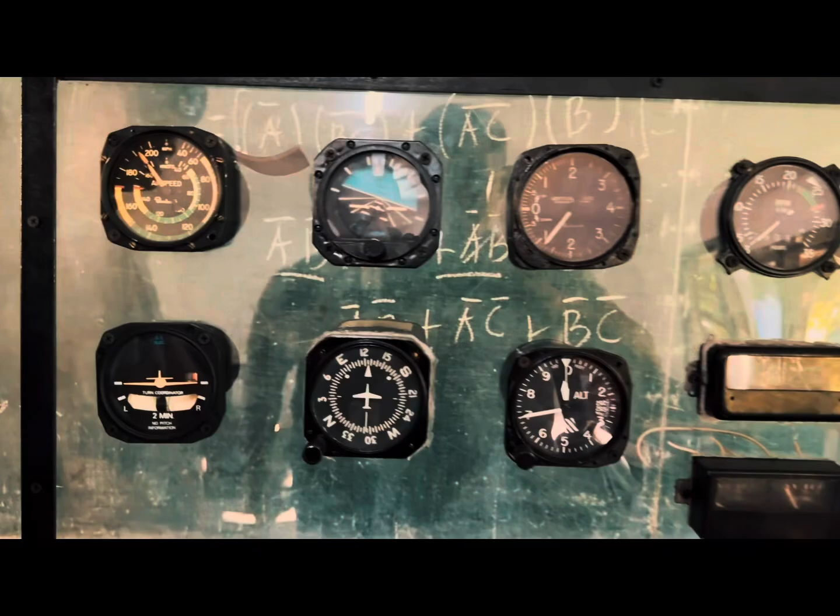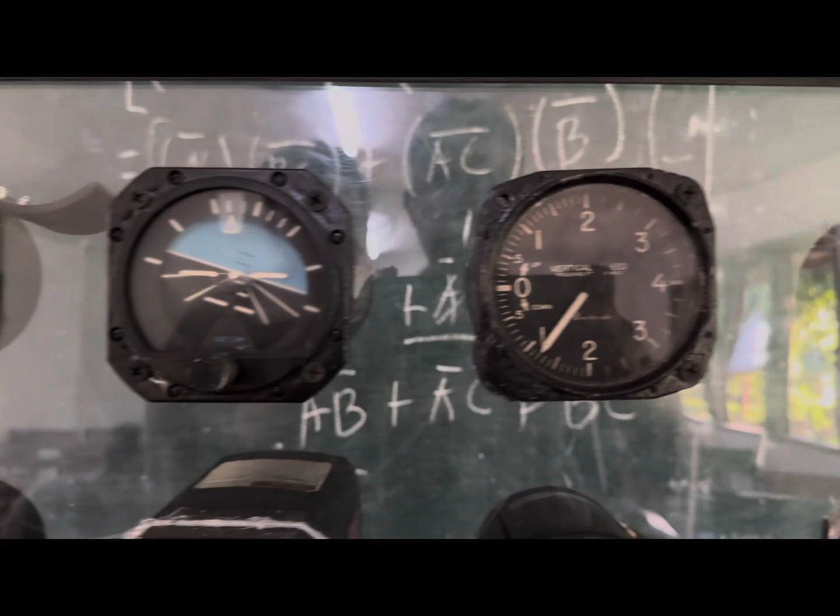In this video we're going to talk about the 6-pack instruments and the other instruments or gauges such as tachometer and oil pressure and temperature gauge. Without further ado, let's get into it.

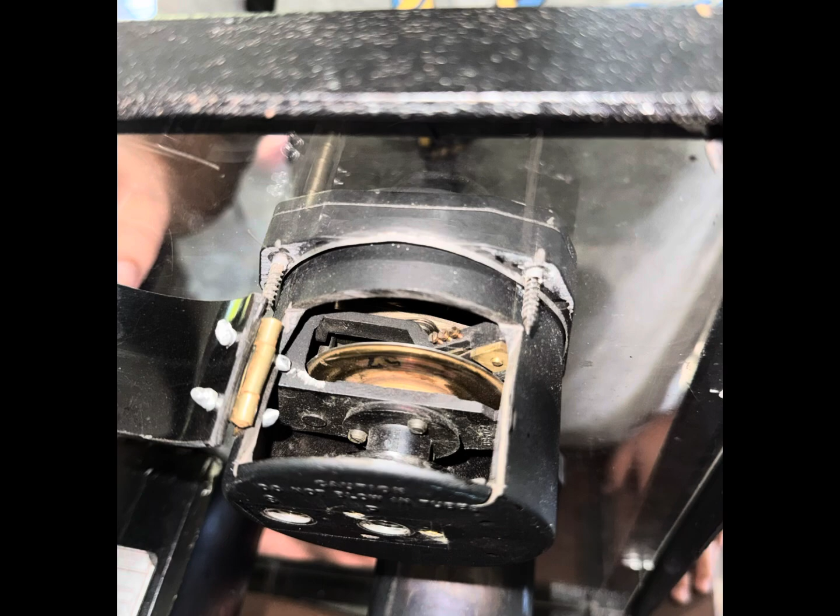Let's start with the airspeed indicator. Its function is to display the aircraft's airspeed in knots or miles per hour. How it works: connected to the pitot-static system, it measures the dynamic pressure difference between total and static pressure, and the reading is calibrated to indicated airspeed.

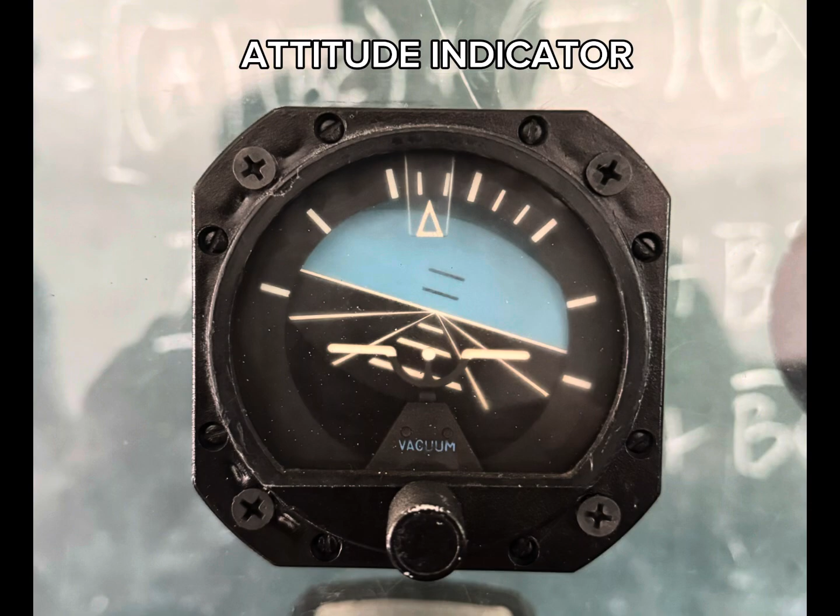Attitude indicator, or artificial horizon. Its function: shows the aircraft's orientation relative to the horizon, including pitch and bank angle. This is how it works: it uses a gyroscope to maintain a fixed reference. The instrument face displays the horizon line with a miniature aircraft symbol that indicates the aircraft's attitude.

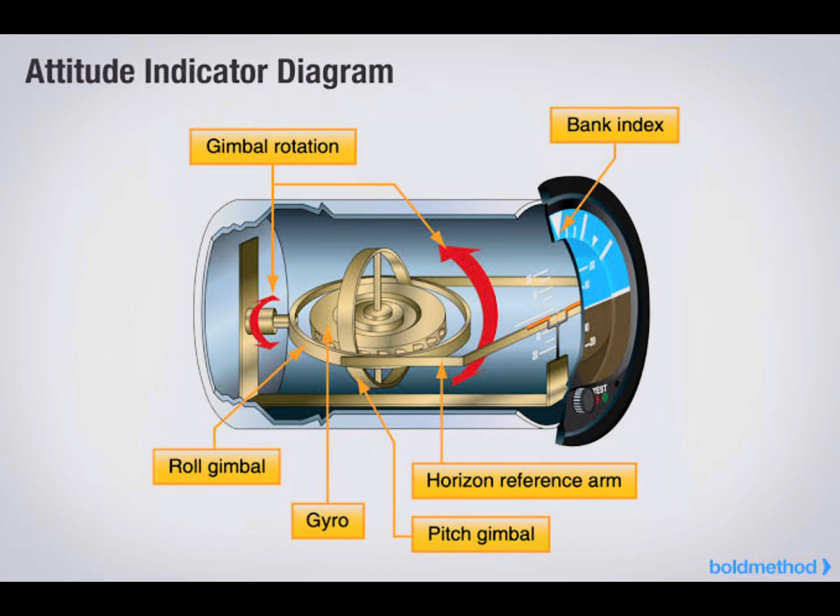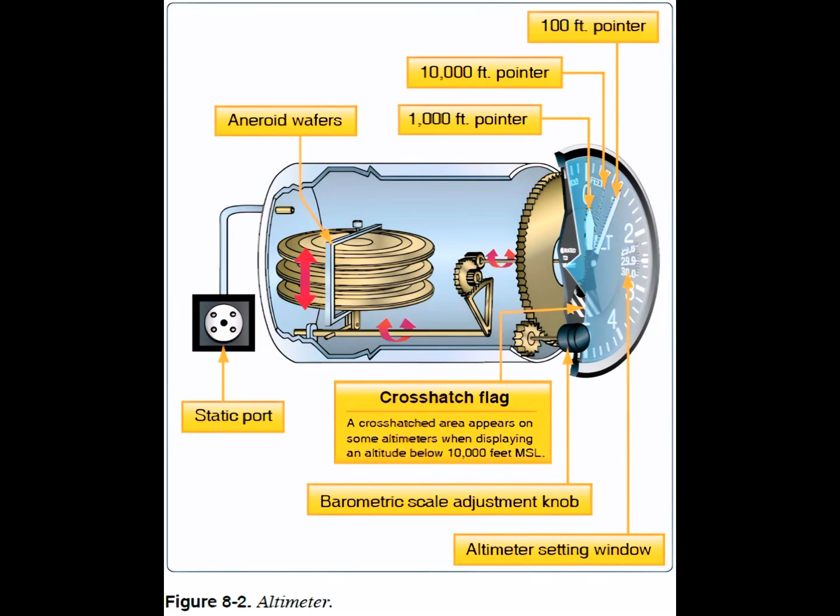Let's move to the altimeter. Its function is that it displays the aircraft's altitude above mean sea level, or MSL. How does it work? It uses the static pressure from the pitot-static system. The instrument contains aneroid wafers that expand or contract as static pressure changes, moving the needles to indicate altitude.

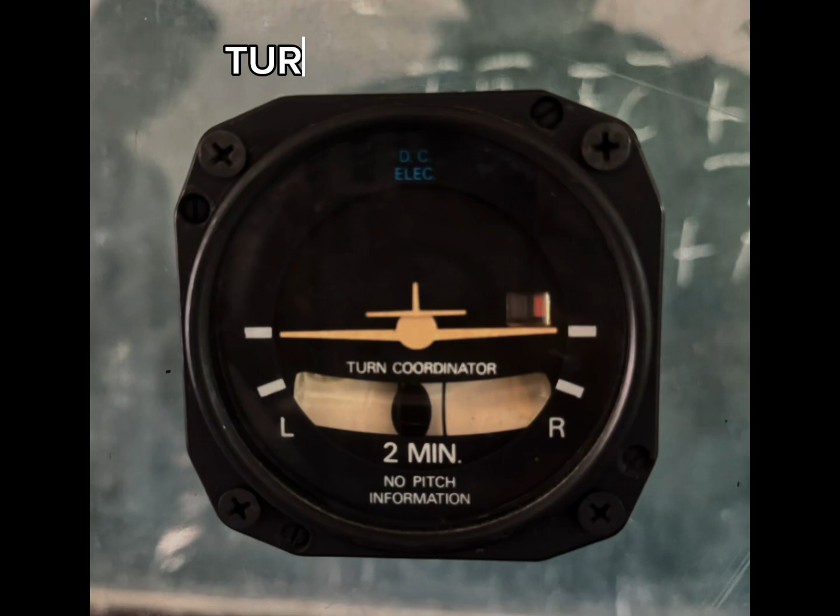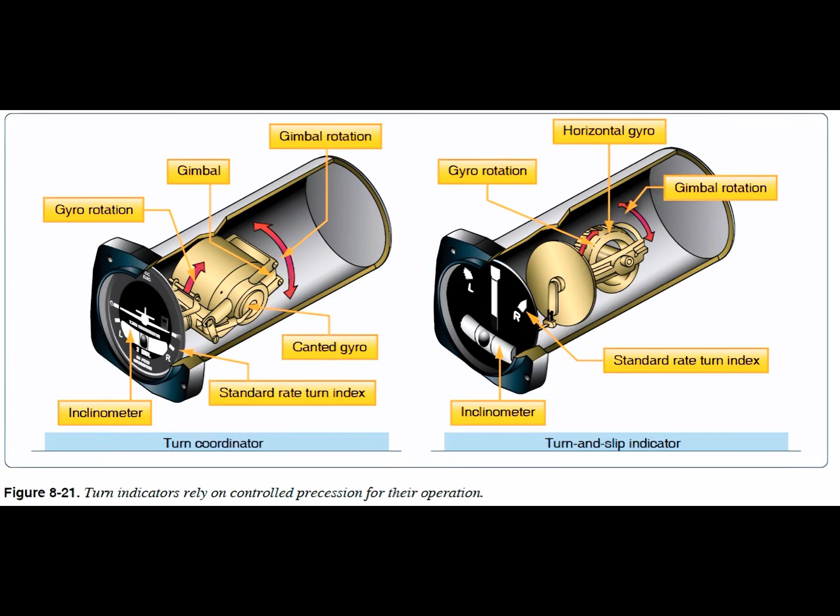Turn coordinator. Function: it indicates the rate of turn and slip or skid condition. How it works: it operates with an electric gyroscope for turn rate and an inclinometer to indicate slip or skid. A coordinated turn keeps the ball centered.

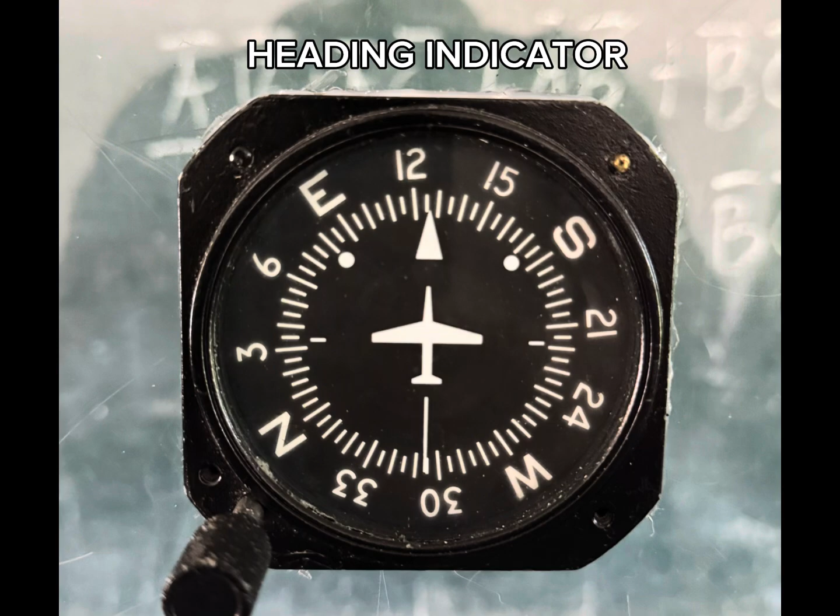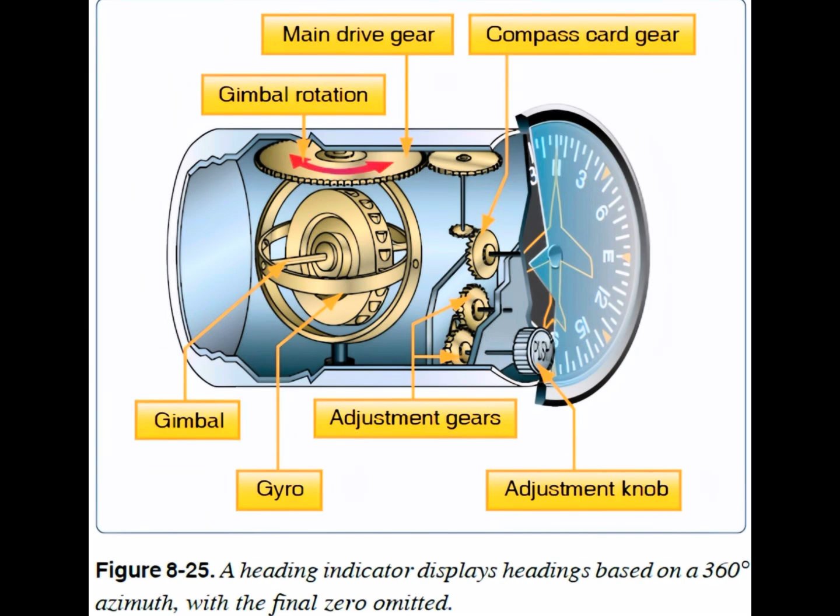Heading indicator. Function: displays the aircraft's heading relative to magnetic north. How it works: a gyroscope provides a stable reference for heading. It requires periodic alignment with the magnetic compass because of gyroscopic precession and drift.

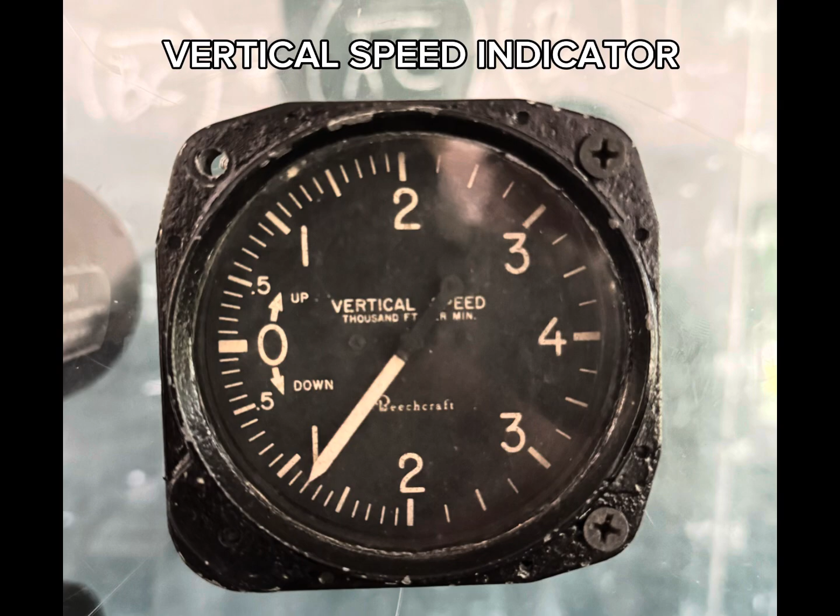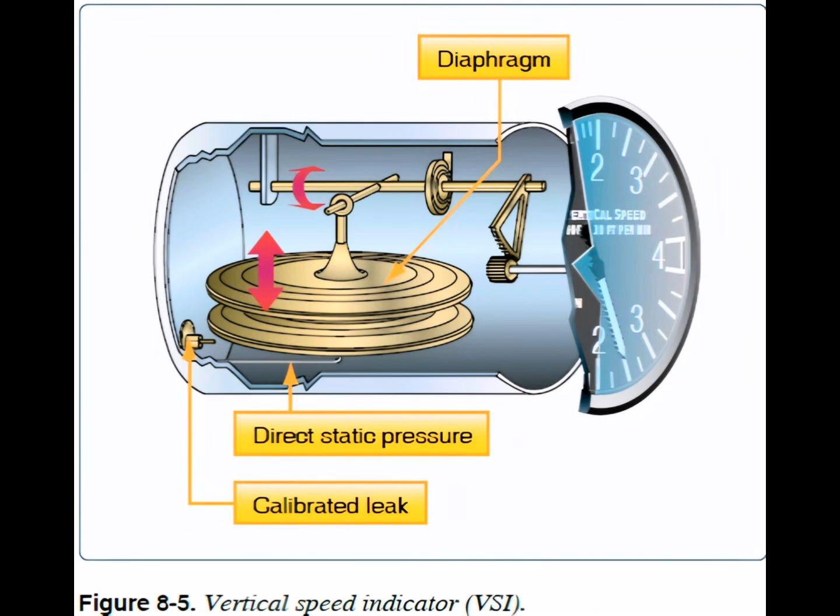Let's move to the vertical speed indicator, or VSI. Its function is that it indicates the rate of climb or descent in feet per minute, or FPM. How does it work? It measures changes in static pressure. A calibrated leak allows the pressure to stabilize, creating a differential that shows vertical speed.

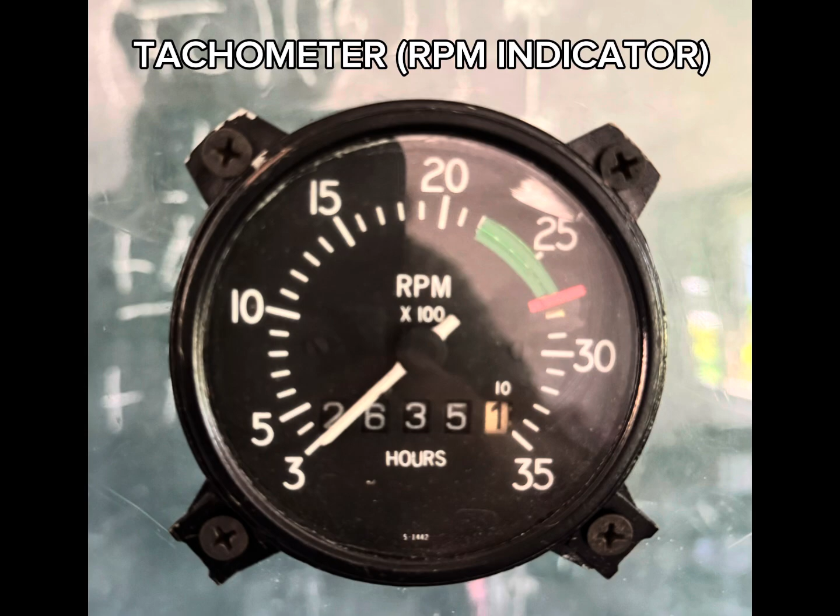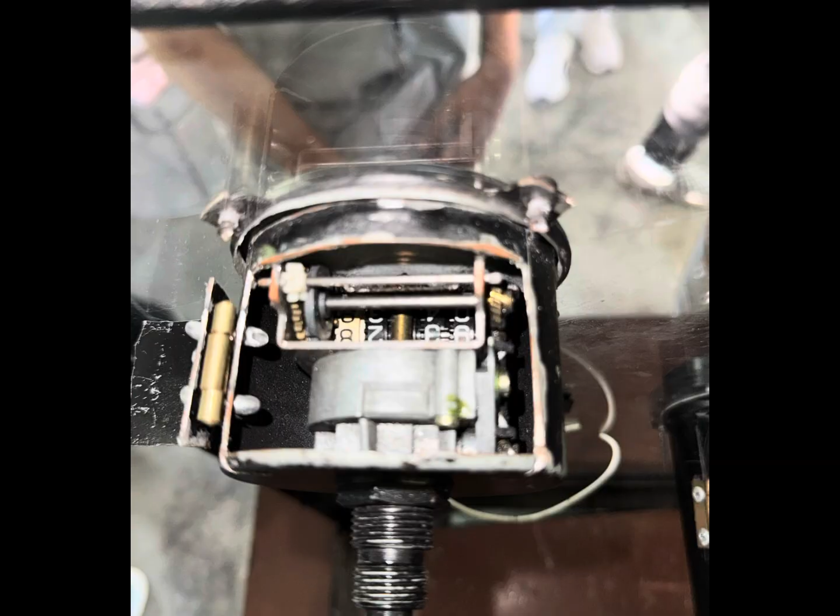Tachometer, or RPM indicator. The primary purpose of the tachometer is to indicate the engine's RPM, allowing the pilot to monitor engine health and set the appropriate power for different phases of flight, for example takeoff, cruise, and landing. So how does it work? The tachometer can be driven mechanically, electrically, or electronically, depending on the aircraft type.

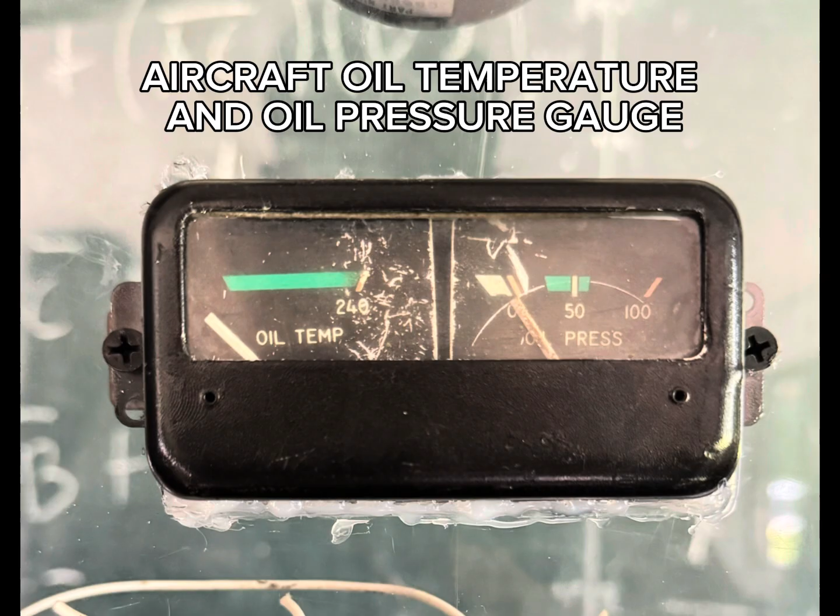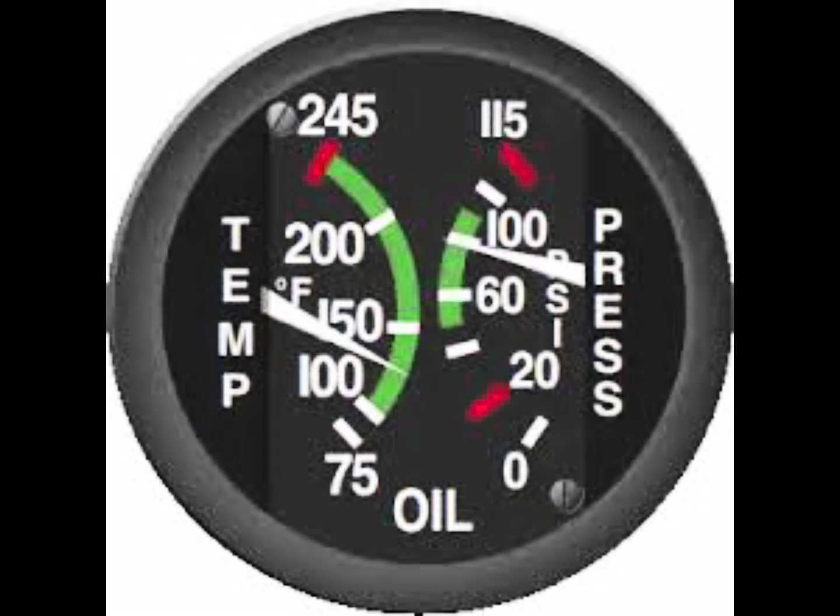Next is the aircraft oil temperature and pressure gauge. These gauges monitor the health of the aircraft's engine by displaying the oil temperature and pressure, which are critical for proper lubrication and cooling. The primary function of the oil temperature gauge is to display the temperature of the engine oil, ensuring it stays within safe operating limits. How does it work? It uses a thermocouple or a temperature-sensitive bulb filled with liquid. The thermocouple generates an electric signal based on the oil's temperature. The signal is processed and displayed as a temperature reading.

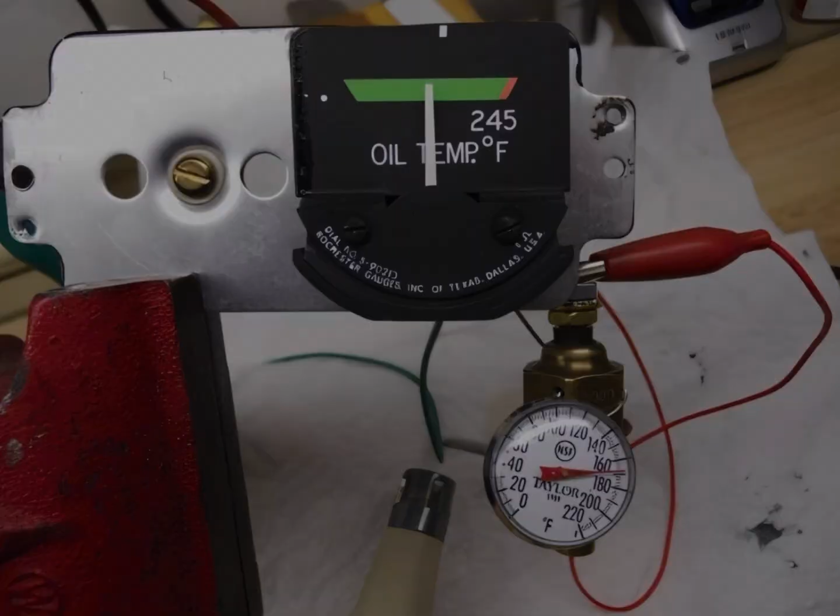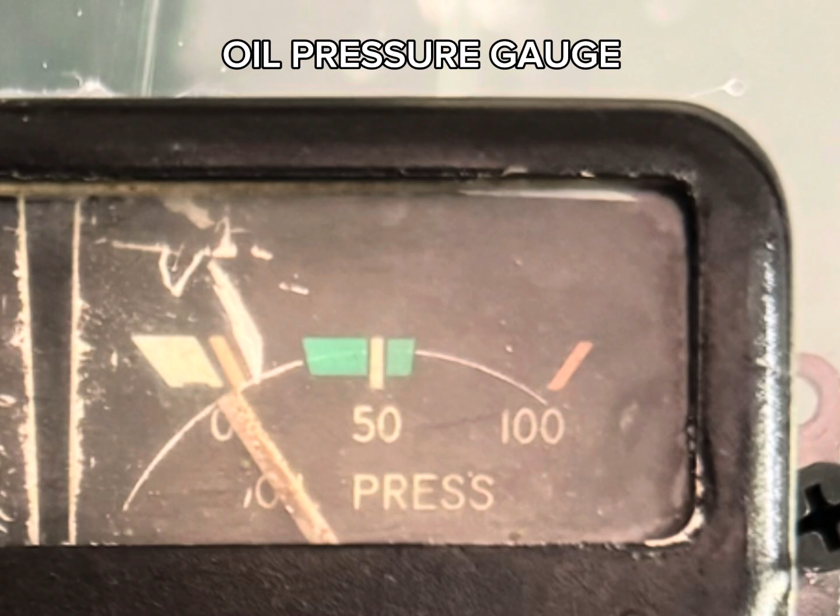Next is the oil pressure gauge. Its primary function is to display the oil pressure in the engine, ensuring sufficient lubrication to prevent engine damage. So how does it work? Connected to the engine's lubrication system, a Bourdon tube or electrical transducer measures oil pressure. Pressure changes cause the tube to deform or generate a signal, moving the needle or displaying the value electronically.

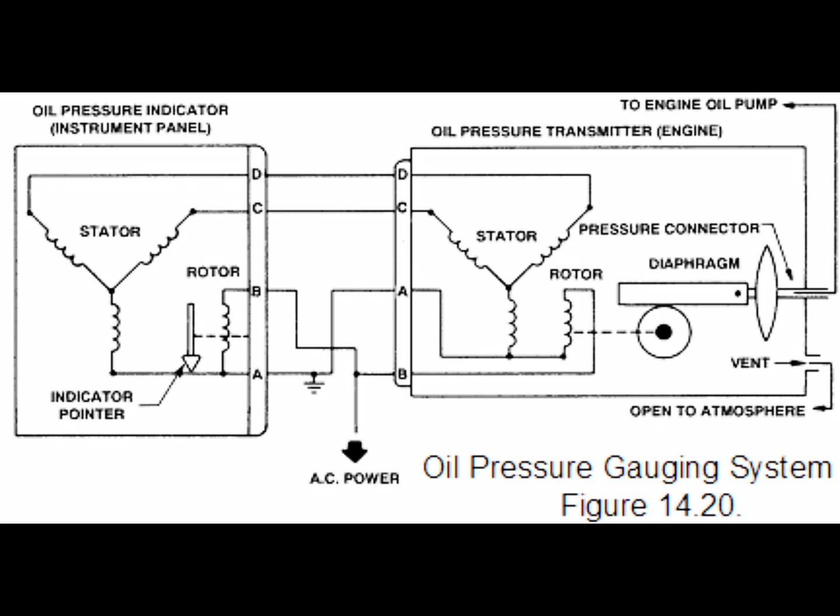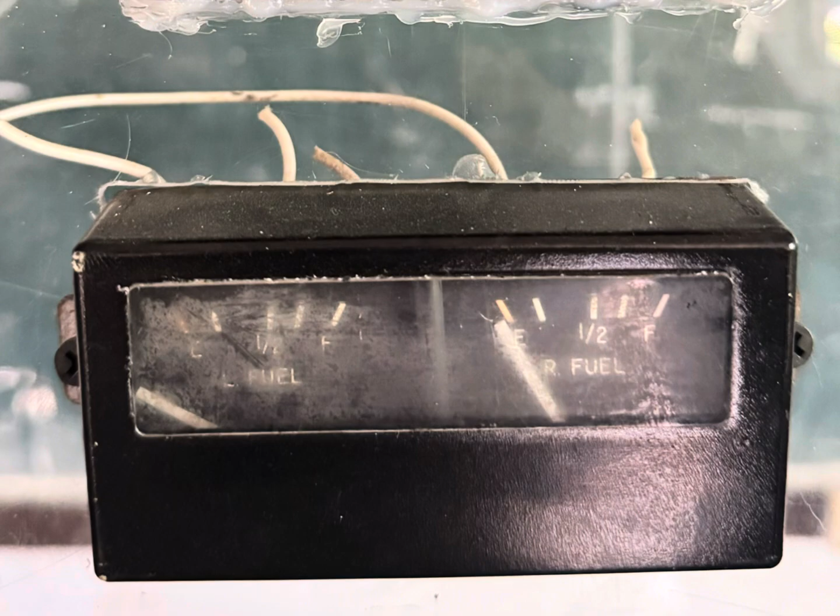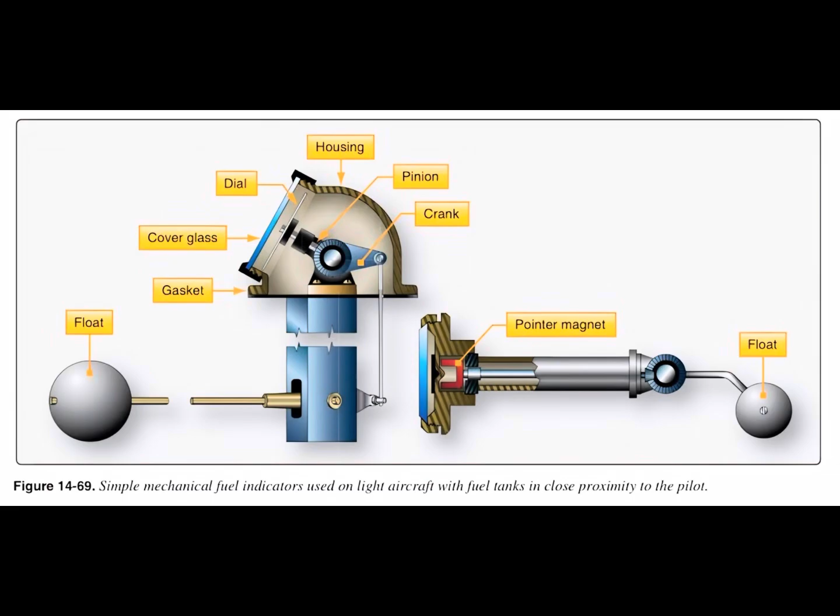The aircraft fuel quantity gauge indicates the amount of fuel in the aircraft's tank, helping ensure safe and efficient flight planning. So how does it work? A fuel sensor located inside the fuel tank can be a float type, where a float moves with the fuel level, adjusting the resistor to vary the electrical signal, or a capacitance type, which measures changes in capacitance caused by varying fuel levels. The sensor sends an electrical signal proportional to the fuel level to the gauge, which processes the signal and displays the fuel quantity either via a needle or a digital readout.

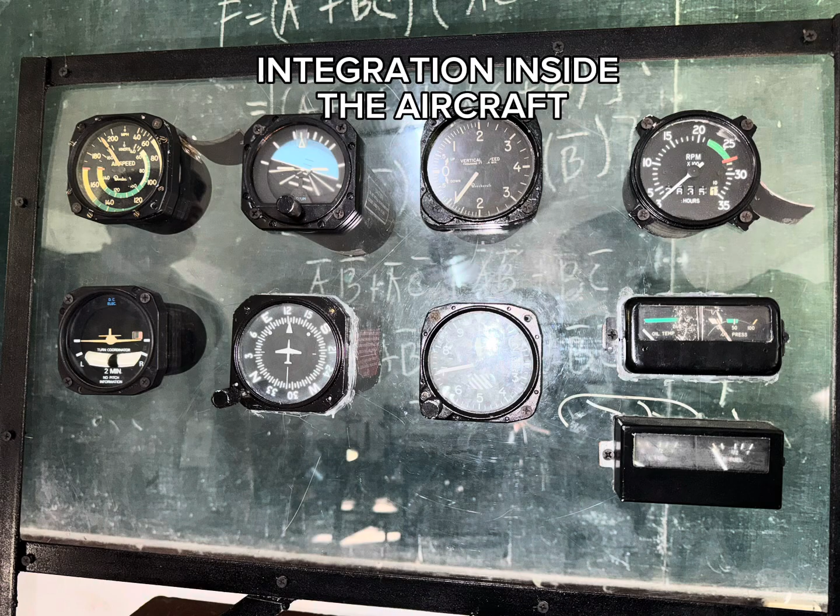Let's talk about the integration inside the aircraft. These instruments function through two primary systems: the pitot-static system and the gyroscopic system. The pitot-static system feeds data to the airspeed indicator, altimeter, and VSI, measuring air pressure to calculate speed, altitude, and climb or descent rates.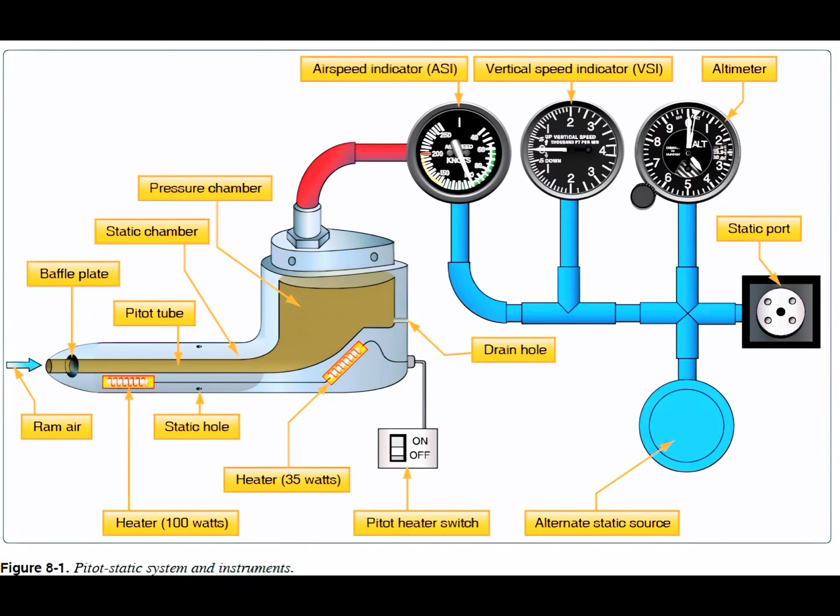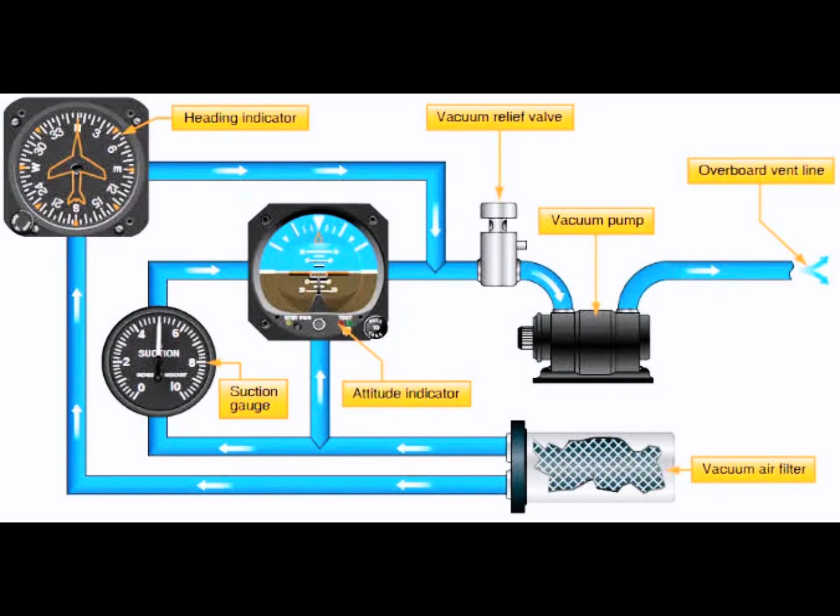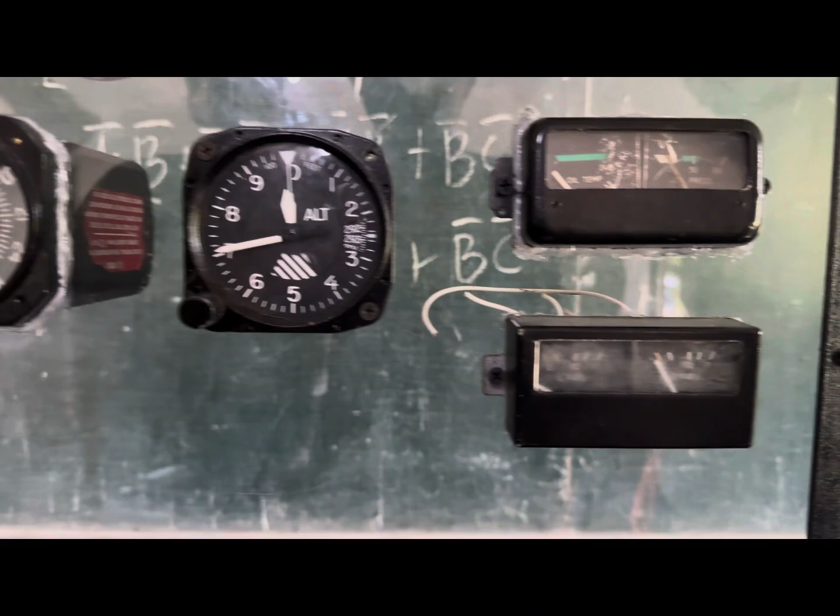The gyroscopic system powers the attitude indicator, heading indicator, and turn coordinator. It relies on gyroscopic principles of rigidity and precession for stability and movement. By combining data from these instruments, pilots maintain situational awareness and control the aircraft during flight, ensuring operational safety and efficiency.